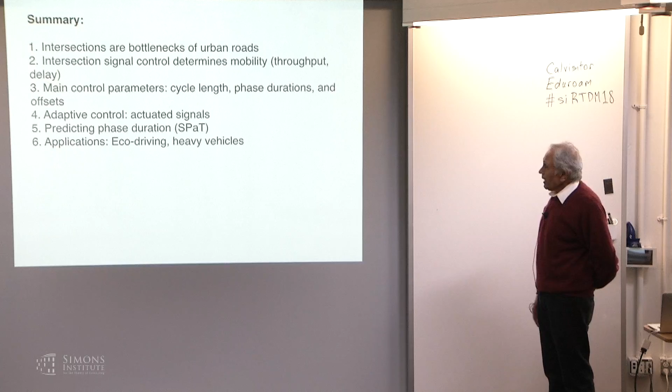And then I'll move to adaptive control, where the duration varies depending upon the sensed traffic by the controller. And then predicting how long a particular phase will last, and some applications for why people care about that.

And so I said intersections are bottlenecks, so let's look at that intersection, sort of a typical four-leg intersection. And in those four legs, there are two lanes - well, there are three lanes, but let's just look at the left turn lane and a through lane. The right turn lane, I assume, is always permitted, so there's nothing to do with the intersection control, because the right turns are always permitted. So let's assume there's four approaches, one through and one left turn lane.

A typical number about how much capacity, how much flow one lane can carry - a number to remember is about 1,200 vehicles per hour. So 1,200 vehicles per hour can go through one particular lane. It may go as far up as 1,800, but that's just for purposes of this. So the access capacity, the number of vehicles which can enter that intersection - you have 8 possible lanes, 2 in each approach. So 8 times 1,200 is 9,600 vehicles per hour. That's the access capacity of that intersection.

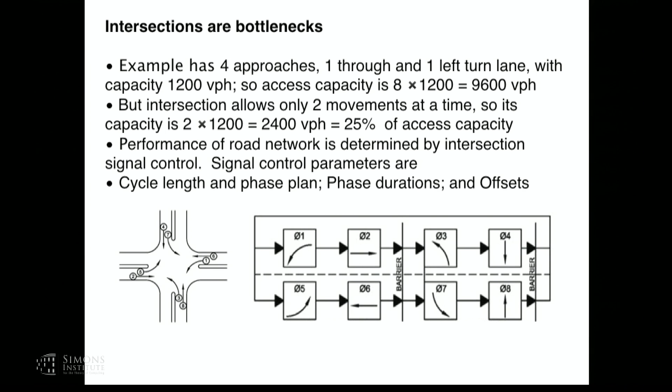However, the intersection can only allow 2 of these movements at any given time, which are non-conflicting, otherwise you'll have a mess. So only 2 are permitted, which means the intersection will permit at most 2 times 1,200, or 2,400 vehicles per hour, which is 25% of the access capacity. So the intersection is the bottleneck - it can only carry 1/4 of the throughput that the roads can bring to it. So the performance of the road network is determined principally by how the access to the intersection is controlled.

That's usually by means of signals - either you have green, in which case you can go, or it's red, in which case you shouldn't go. And so the signal control parameters are cycle length, and the phase plan, the phase durations, and the offsets.

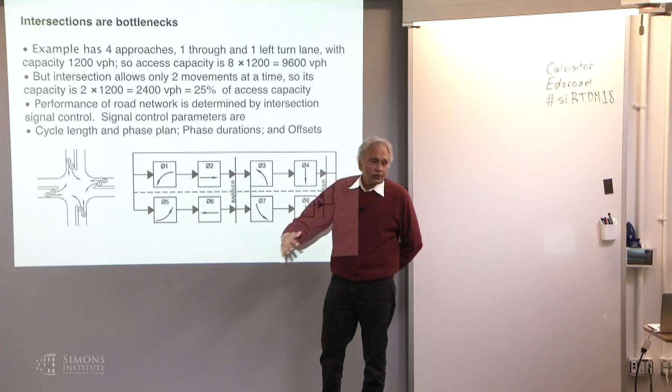So this particular intersection, we have each movement called a phase, so there's 8 phases. The odd numbered ones correspond to turns, and the even numbered ones correspond to through movements. So that's just something to remember. If you talk to a traffic engineer and he says phase 1 and phase 5 are actuated at the same time, that means 2 left turns are actuated at the same time.

So typically in a phase plan, you'll have 2 phases that are actuated, get a green at the same time. Then you switch to another 2. And then you switch to another 2, and another 2. So that's how these 8 phases get actuated. And then you come back to the beginning of the cycle. So a cycle consists of a sequence of pairs of phases that get actuated.

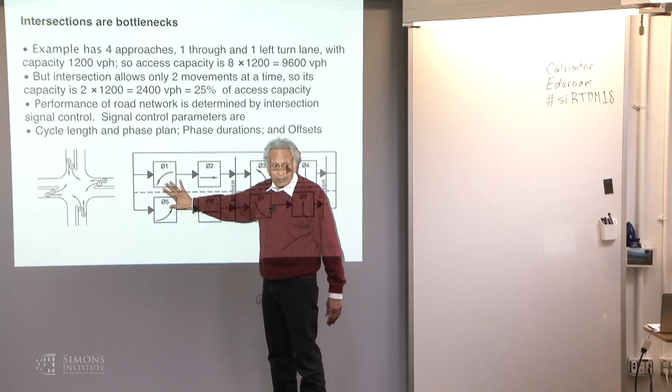The amount of time that this pair, for instance, is actuated is called the duration of that phase - that's the phase duration. And the total cycle time coming back is called the cycle time. Typically, I'm going to assume, and that's the case in most places, the cycle time as you come back is fixed. There's a reason for fixing that, but we'll get to that.

So for instance, this may have a total cycle time of 120 seconds, or 2 minutes, and you may spend 30 seconds in each phase. Normally that's not the case - in the more heavily traveled direction, you have a longer duration than the other.

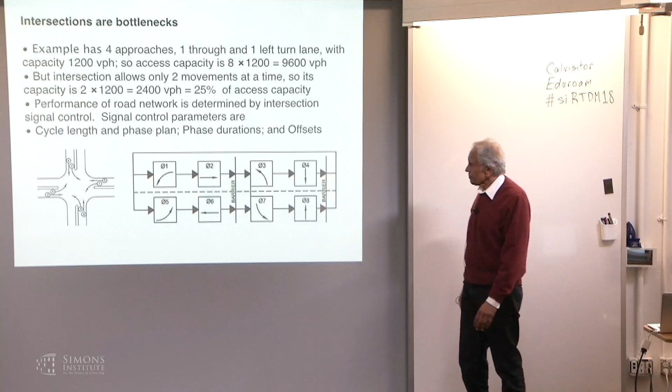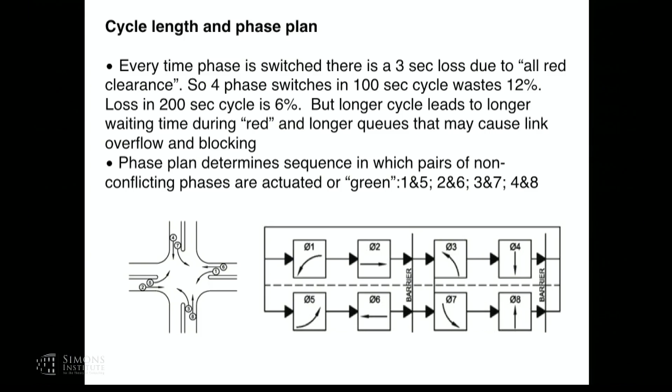So you can think about, if you're a queuing theorist, that this intersection consists of 2 servers, for the 2 directions, and there are 8 queues. It can serve 2 queues at a time, but not any 2 queues, because they have to be non-conflicting. I cannot serve this queue and this queue at the same time. So the pairs of queues that I'm allowed to serve, that looks like a standard queuing problem.

There's one hitch, and that is every time you switch, say from this phase to the turns, there's something called an all-red clearance. So I have 2 greens, and before I switch to another 2 greens, I have to have everybody red. It's usually 3 seconds, called an all-red clearance, so that vehicles who are not very alert, who are still in the intersection when the phase switches, get time to get out of there. So that's wastage, and 3 seconds is wasted every time you clear.

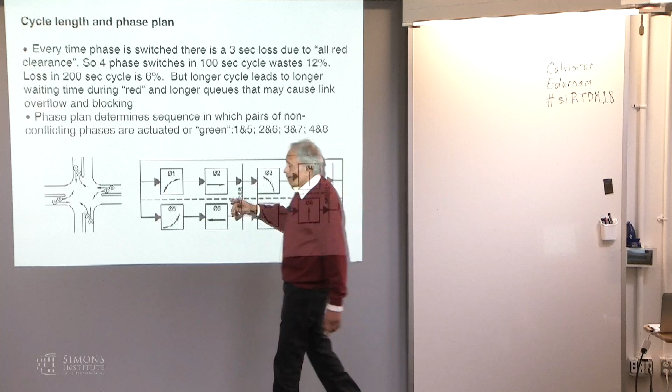I'm disregarding right turns in general. In case the right turns have a signal, then almost invariably the right turn is permitted at the same time as the through movement. But for my discussion, I'm just assuming the right turn is permitted at any time, so they don't offer you any problems in terms of usage of the intersection.

So if you have a switching, or serving discipline, the switching creates a big problem. Most of your theorems of server, multi-processor, whatever, break down.

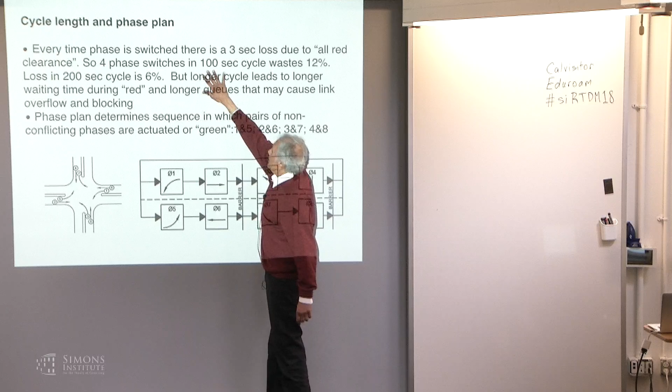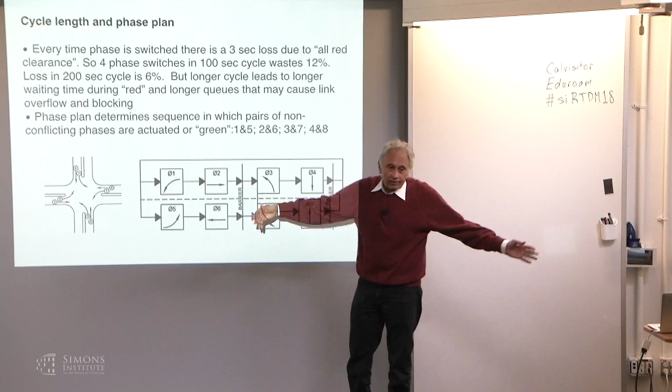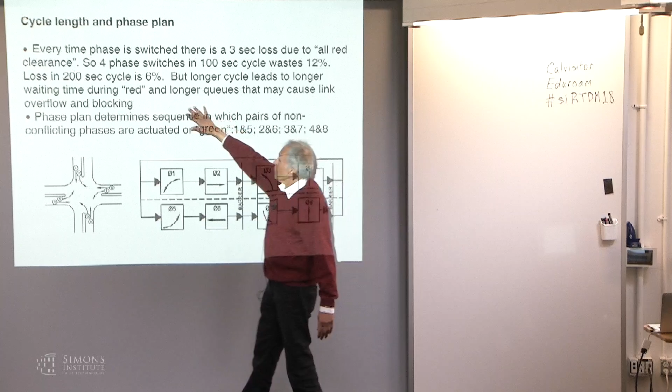So there's an obvious thing to do. Supposing this cycle was 100 seconds, and there's going to be 4 switches per cycle, so I'm going to waste 12 seconds in all red. That's a wastage of 12%. So the obvious thing to do is extend the cycle. If I make the cycle 200 seconds, again you waste 4 times the red, so I only again waste 12 seconds total. So that's a wastage of 6%. So the thing to do is to increase your cycle, then the waste goes down.

But people don't like increased cycles. They're going to wait for 2 minutes or 3 minutes or 4 minutes. So that's one problem, that people get upset for a long cycle. But more importantly, if there's a long cycle, then there's also a long red, and the queues build up, may saturate and affect the previous signal. So you have to compromise. You want a long cycle to reduce the wastage, but you want a short cycle to prevent queues from building up. So that's an issue about how big a cycle length you should create.

Typically, if there's a lot of traffic, and you'll find this in most cities, the cycle lengths increase, because if you give too much red with heavy traffic, you'll saturate the signal. And if there's very little traffic, at the middle of the night, the cycles are normally shorter, so people don't wait, since there's plenty of capacity.

So this analysis is currently non-adaptive. Not yet, I'll come to the adaptive part. But the adaptive part is principally for phase durations being adapted, not the cycle time. The cycle time is kept fixed, for a reason we'll come to, which is offsets. So offsets require a fixed cycle time.

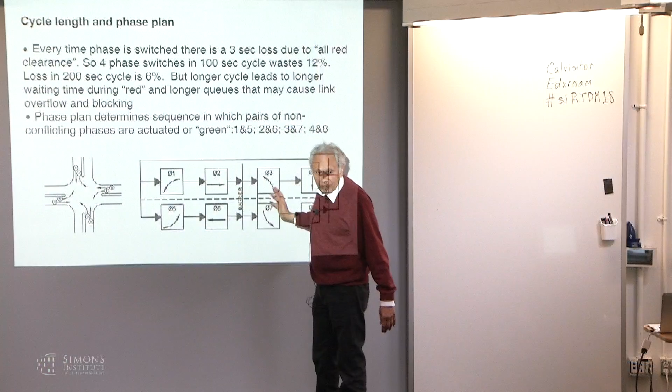So the phase plan determines the sequence in which phases are operated. Now the duration, how do I fix the duration? Let's take a phase I. We have somehow managed to fix the cycle time, t, 100 seconds, 200 seconds, whatever it is. Then for phase I, g sub I is the fraction of time in the cycle that direction gets a green, the green time. So g sub I divided by t is the fraction of cycle devoted to phase I green.

S sub I is some magical number called the service rate if we're queuing theorists, but normally it's called the saturation flow rate by traffic engineers. It's exactly the service rate, which says that if nothing else is going on and you had an infinite queue and this light was green all the time, S sub I vehicles per hour would go in that direction. That's S sub I.

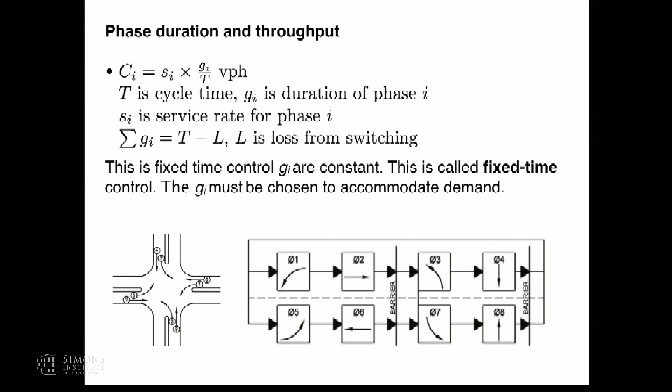So you have to select these G sub I's, that's the phase duration. S sub I is a physical thing depending upon the width of the road, whether it's graded or not, so S sub I is given physically. T you've already decided, so you have to pick G sub I. There's a constraint: the sum of the G sub I, the total green time, is the total cycle time minus the loss due to red clearance. So it's a straightforward problem, right?

This is called fixed time control. I'm going to fix G sub I for every cycle. There's nothing adaptive here, right? It's a fixed time control, and so the G sub I's are constant that you will select, and they must be chosen to accommodate the demand.

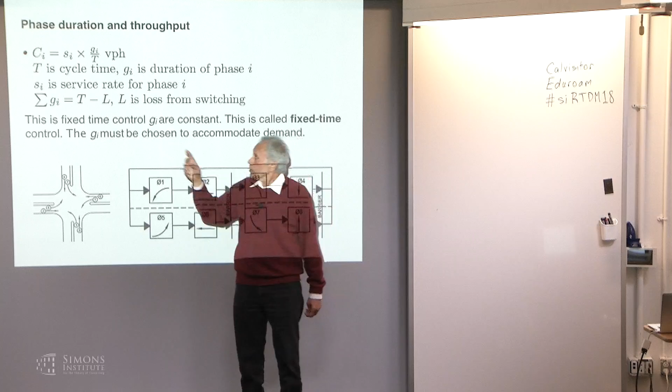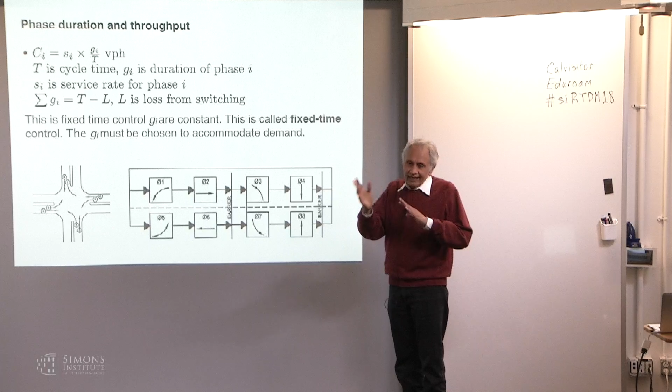Depending upon how much demand there is approaching in the through directions, from south to north versus east to west, you have to select the G sub I so that C sub I will be larger than your demand. If I give you the demands, it's a straightforward problem to figure out G sub I. There's some flexibility as to how you should choose GI, and because hopefully the total rate available is larger than your demand, you can distribute the excess in all directions, or toward a particular direction where there's greater uncertainty about the demand.

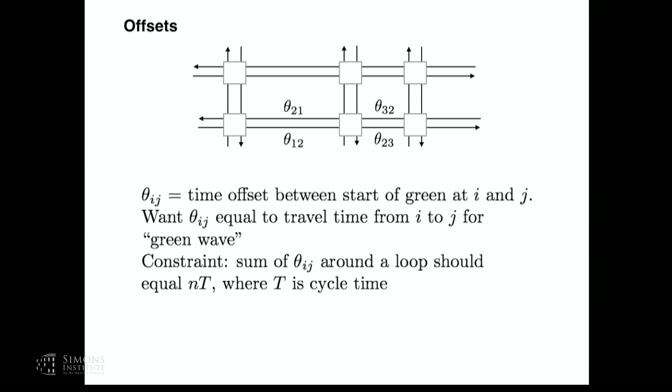I started green, it takes me 5 seconds to get here, or 10 seconds to get here. Then I want this green to start 10 seconds after this one. Is that clear? And then this takes 7 seconds, so I want this green to start 7 seconds after that one. That displacement of the beginning of green is called the offset. The offsets are very critical, because that determines whether everybody — if it's a bad offset, I only hit the red light every time I cross. And if it's good, synchronized, so-called, then I get a green wave.

We assume, implementation-wise, that there's a common global clock. So implementation-wise, there's somewhere some intersection — it doesn't matter — where these offsets are set by a traffic management center, which says right now is 0, and the cycle time is 120, and you will start at 0. Your synchronizing phase, which I said in this case is phase 2, will start 10 seconds later, 20 seconds later, and so on. So it looks easy, but there's a problem.

Can offsets also be dynamic? It can be, right? It absolutely should be dynamic — the offset should be dynamic. But I'll come to making things dynamic later. Before I get to that, even in the static case, there's a problem.

The problem is that if I go around a loop, I'm coming back at the same point in the cycle. So theta 1,2 plus theta 2,3 plus theta 3,2 plus theta 2,1 must be a multiple of the cycle. That's an integer constraint on the cycle — it has to be a multiple of the cycle, because I'm coming back to the same point.

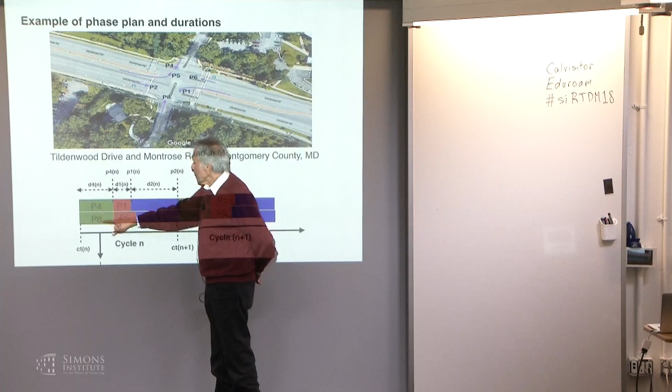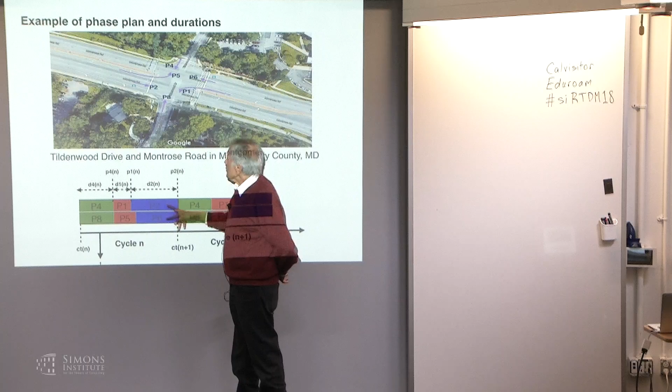So there are only 6 phases in this; 2 phases are missing or have 0 time. Let's suppose the plan is that P4 and P8, the through direction for the minor street, come first. Then come P1 and P5, the two left turns, and then P2 and P6, the two major through movements. I've drawn them purposely this way to denote that this duration and these durations can be varied.

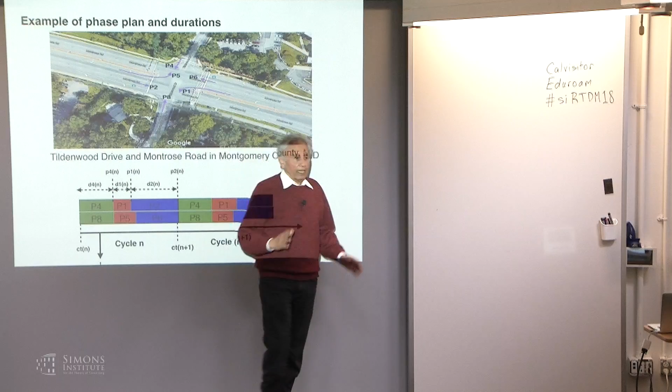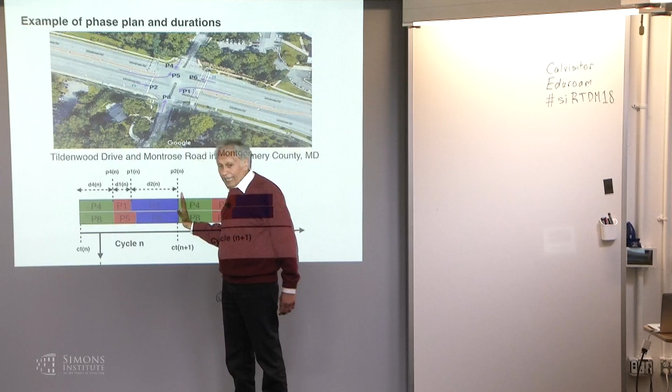That's called actuated signal or adaptive duration—they can be varied. We'll worry about how they're varied. But the cycle time is fixed. So whatever variation you get, if you have extra time, you give it to the major direction; if you have less time, you steal it from the major direction. That's a standard actuated control.

How do you decide whether to give more to P4, P8, or P1, P5? Well, you have detectors in the ground that measure how much traffic demand there is. It's all imperfect, but that's what it's supposed to measure in this direction and that direction. If the traffic is higher than expected, you give it some more green—if I have more left turns than expected, I give the left turns more green. And if there's less, I turn the green to red and give the extra time to the through movement.

That's an actuated signal. Increasingly more and more signals are becoming actuated, because it provides some adaptivity—if I notice there is more demand here—but it's not long-term adaptation. There's no algorithm which is going to estimate the demand that is coming and account for that. Everything is sort of a 1 cycle, 2 cycle, 3 cycle horizon.

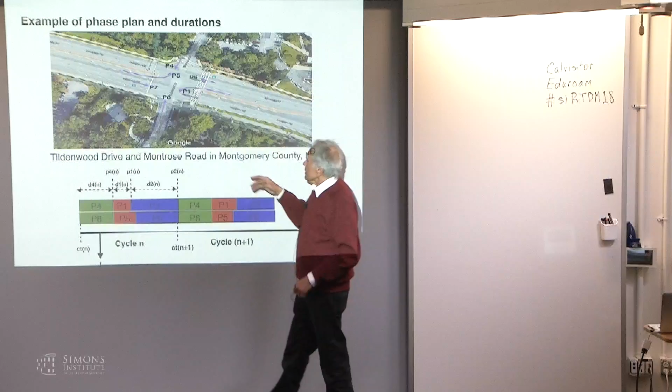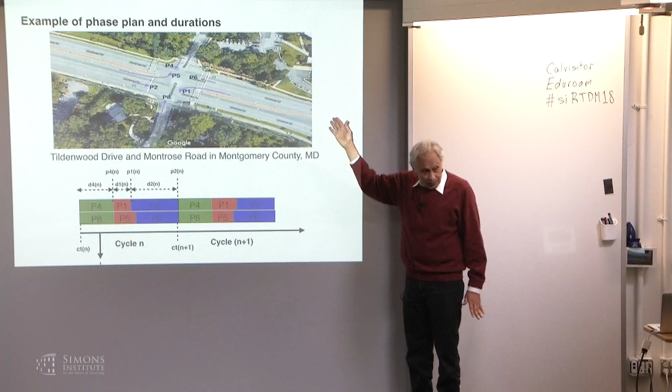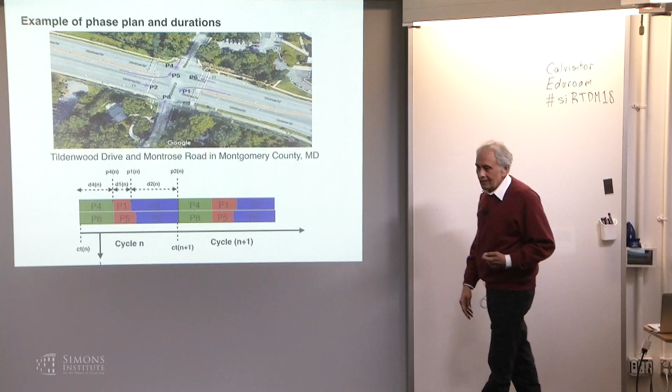That's the current practice. You would say it's possible that if I see a lot more here, I know they will show up at the next intersection, so I can use that to give more time to the through movement in that direction. Okay, so that is done—several commercial packages look at 2, 3 intersections and decide.

But if this is variable, then you cannot predict when my green will happen. Now, you may not care, but it is useful, and that's where I want to go with an actuated signal. So I'm going to look at the durations, just looking at one direction—the major direction. I'll ignore this one, but the same calculation goes for the other. So what I want to do is to predict.

So at any time t in the cycle, I want to predict, this is phase 4, and p4(n) is the end of that phase 4. So it's the end of green, or the beginning of the next red. So I want to predict at this time t, how much time is remaining in phase 4, how much time is remaining in phase 1, which is the remaining phase 1 plus that, plus etc.

Right? So these phases are no longer fixed time, so it's not 20 seconds, 40 seconds, 60 seconds, but maybe 20 seconds plus or minus something, and 40 seconds plus or minus something, and that's a random thing which depends upon the traffic, and that I don't know how much traffic there is. Not only does it depend upon the traffic, but it depends upon how the controller senses that traffic and what kind of algorithm it is using to increase or decrease the green times.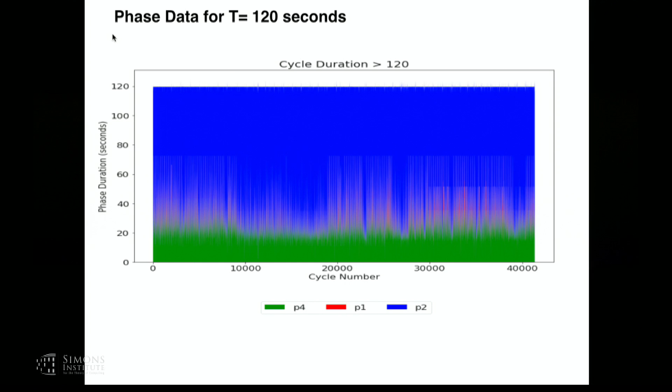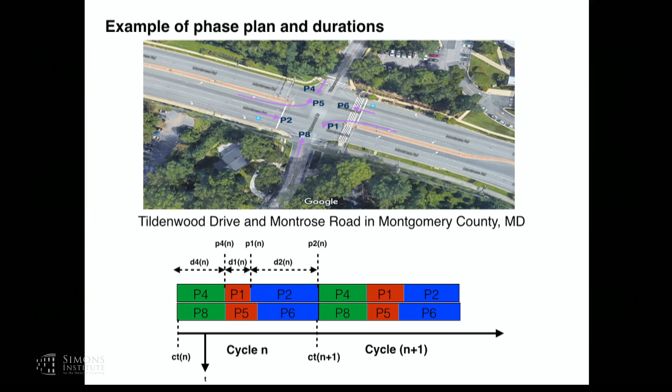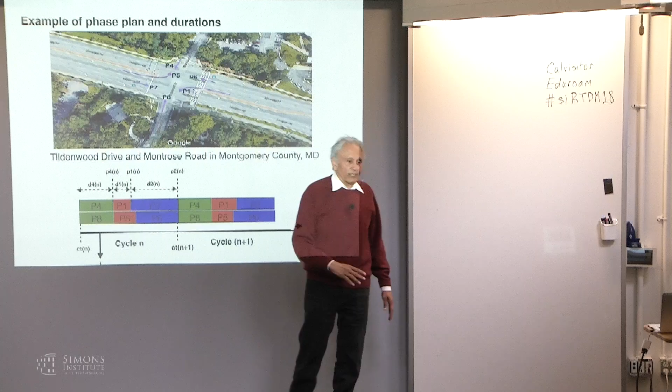And why is that? And that is because it's a fairly wide street, and this green, when it's green, pedestrians are allowed to cross. The pedestrians have to make it to the other end safely. So there's a minimum green which is given for the pedestrians, right? Beyond the minimum green depends upon how much traffic there is. So that's the minimum green.

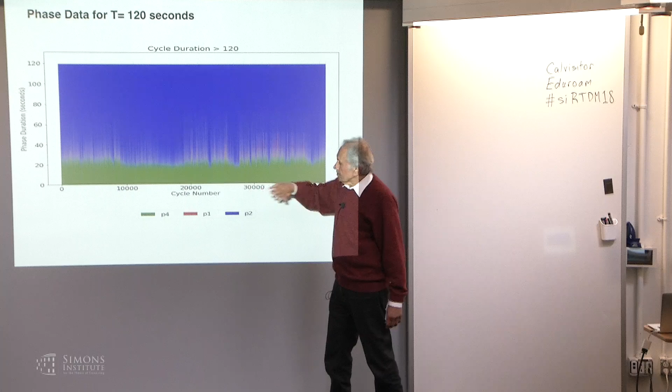So you can take the histogram of D4, and you see that it's minimum at least this much. That's for the pedestrians. And then it goes up, and it's got this shape. This shape comes from an extra vehicle, so the extra vehicles extend the green probability, and so on.

Okay, now we're somewhere t seconds into the phase P4. It's still green, and you want to know how long it will continue. There's an obvious thing you do: at any time t, say 34 seconds have passed in that phase, and you're required to predict to the vehicle how long that phase will last. What will you do? You take the expected value of the remaining duration given time t. If t equals 30, the prediction of D4 is still green, so D4 beyond 30 is your best prediction. You do best if you use mean square or something like that - that's the conditional expectation of the remaining duration.

Some interesting thing: if you look at this, now it's the duration, remaining duration, D4 minus T. What you observe is initially it'll decrease - of course time has gone by, so you expect the remaining duration to decrease. But then all of a sudden, your best prediction goes up because you passed that small thing, and now the next big probability is somewhere there. And then it goes back again. This is like your file downloads, right? The time goes down, 5 seconds, 4 seconds, 2 seconds, then all of a sudden it goes up to 5 seconds, etc.

So the residual phase duration may increase or decrease. That's the nature of the actuated signal.

Now, one reason people are proposing that a SPAT intersection should provide you the SPAT signal is for so-called eco-driving. Eco-driving means I've arrived at the beginning of the intersection and I want to go through the rest of the street. Most of the energy is consumed in acceleration and braking. If I know that this thing will be green in 20 seconds from now, then I can adjust my velocity profile so I don't do acceleration and braking and make it in the green window. So that requires me to tell you the SPAT prediction.

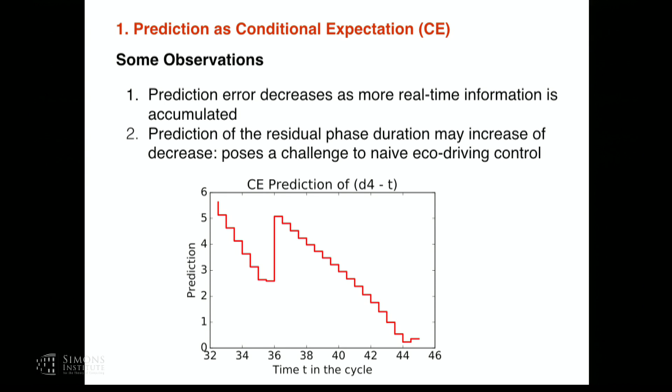But this kind of story, because the prediction fluctuates, makes it difficult to do eco-driving. So Audi has now announced they have something called a countdown timer, which gives you how long the green will last, or when the green will start, one way or the other. But it cannot be just a countdown timer - it also has to allow a count up in the thing. So I'm not sure exactly what they mean by that.

So let's see how you do this eco-driving. How would you design the variable speed profile of this vehicle going through that link? This is the naive user who's uninformed, doesn't know when the red is going to happen and when the green is going to happen. The whole link is 400 meters, and it started at 22 meters per second and just goes at constant speed. It'll hit red and then have to stay until it hits green and go on. So a lot of energy is going to be wasted in the braking. That's the so-called naive user.

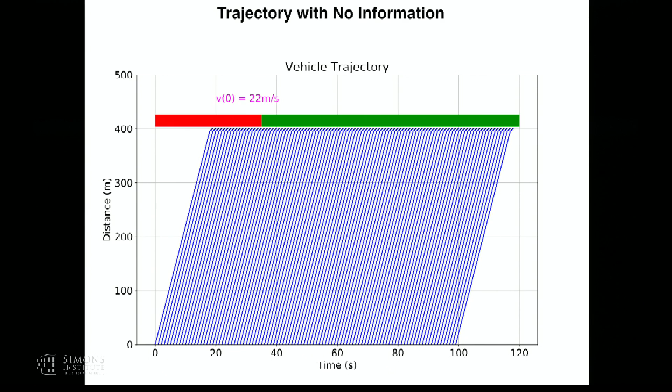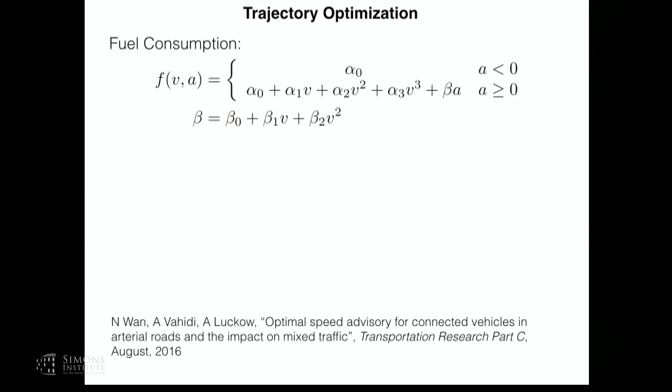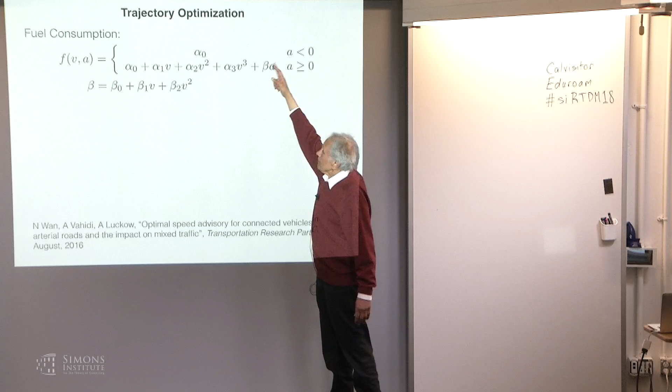Now, if you're doing eco-driving, you are going to design the speed profile of your vehicle as it goes through that intersection when it receives the SPAT signal. So that's in the subsequent stuff, this is the model for the fuel consumption, which depends upon the speed and the acceleration of that particular vehicle. As you'd expect, it increases with speed and increases with acceleration. If it's negative and you're decelerating, then you just pay something constant.

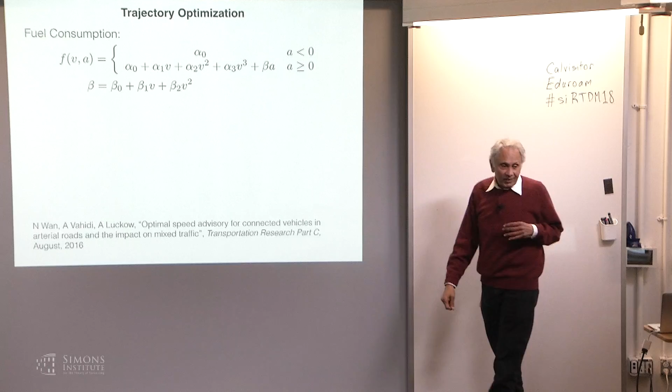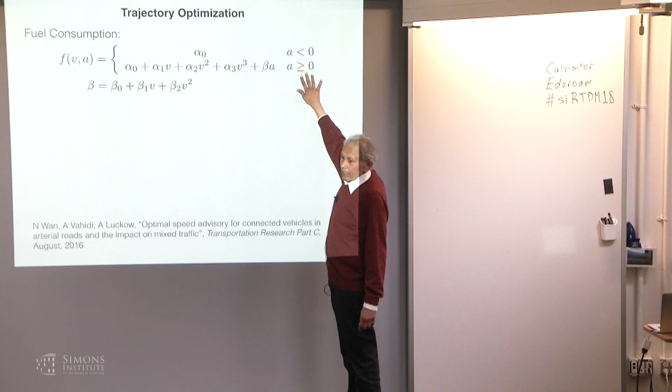Otherwise, that's what you get. So given that, we're going to design, and given when the light is going to turn green, we're going to decide. Can you say what is A? The A is the acceleration. This is decelerating, this is accelerating. But isn't that under your control as well? Oh yeah, it is under your control.

So I haven't yet said, but this is the way your fuel is going to be consumed. Okay, that's the model of the fuel consumption. So you're going to go from beginning to end, that's the model of your fuel consumption. So what's V of t, or what is A of t, and therefore V of t, which is its integral, how is that going to be designed?

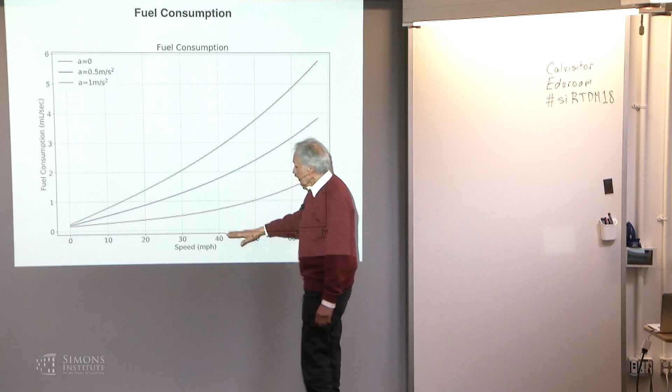So here's what the fuel consumption looks like as a function of speed. It really increases fast with speed, right? Typically, if you're driving at a constant speed, then the drag is what you have to combat with gas, and that's the way it goes. If the acceleration is 1 meter per second squared, and so on.

So the problem is, if I tell you when the red will change to green, that's the time t_red, and I give you that ahead of time at time 0, which is when you're leaving the previous intersection and entering this stretch of road, and I'll tell you what that is, this is the amount of fuel you'll consume from T0 to TF. TF is when you reach the end. D meters is how long that road is.

So the standard control problem, with perfect information, I tell you how much time - 15 seconds, 20 seconds, 2 minutes, whatever. So you want to solve this, so discretize everything. That's the discrete formulation, and you solve it by dynamic programming, going backwards. We know what the boundary condition is - you have to reach D.

And here's what it looks like. If you start out at 25 meters per second, and you want to hit this when it's green - I mean you don't have to, but if you hit it in red, that's bad, because now you're going to brake a lot and waste too much energy. So obviously you should time it so you just enter and exit the road when it's green. So that's what these profiles will look like.

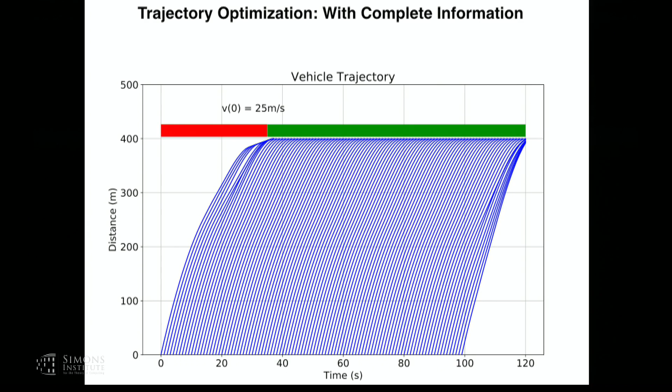So if you're starting at time 0, you'll go this way, and then you know ahead of time, so your velocity profile should be like that. Then you clear the intersection. At the end here, it's becoming red, so you're squeezed a little bit - you have to make it through during the green, so you have to speed up a little bit faster than if you're in here. So this all makes perfectly good sense.

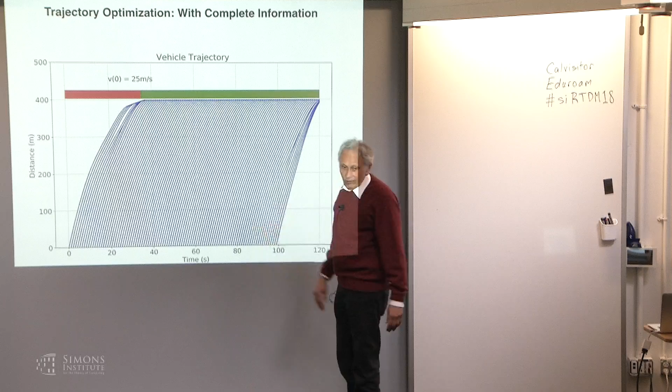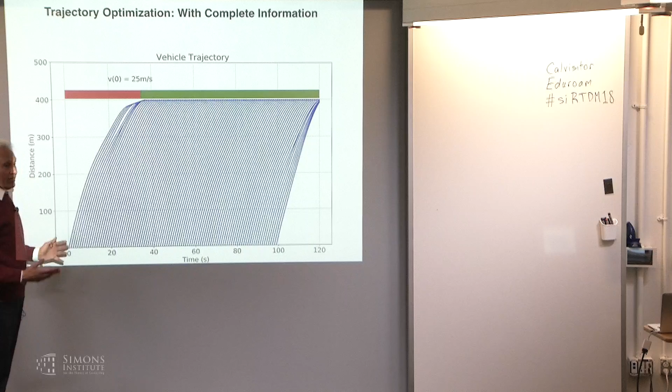Why would it make sense to change the slope as opposed to just choosing a lower slope at the beginning? Why would you not choose just a lower slope at the beginning, over here, instead of changing the slope? This is the optimum, right? So there's a trade-off between speed and acceleration.

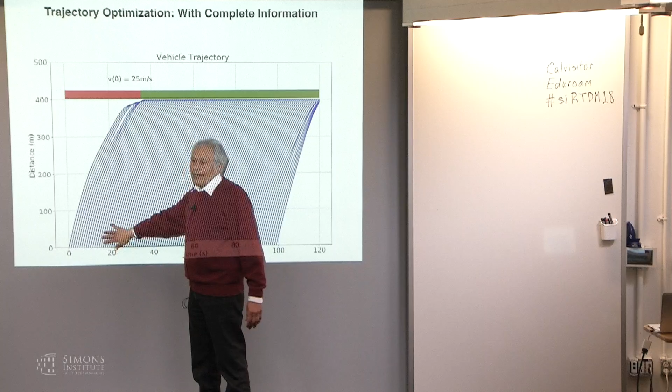Okay, I'll go back. This is for an initial speed - I'm starting, that's my boundary condition. I entered this road at, whatever, 25 meters per second. That's for the given initial speed, that's given. So different initial speeds will have different profiles than this one, right? So that was an example where the initial speed is too fast in some sense - you have to slow down. In that respect, yes. But let me tell you what is too fast and what's too slow. It's too fast because you see this, right?

So this fuel consumption is milliliters per second, but that's not the best measure. What speed should I go? If my road is very, very long, so I'm not going to hit that red light for a long time, then the speed I should go is the speed with the least milliliters per mile, not per second. So I have to take this and divide it by the speed to get the optimum. The optimum speed is somewhere between the slow thing and the fast thing, if it was a long way to go.

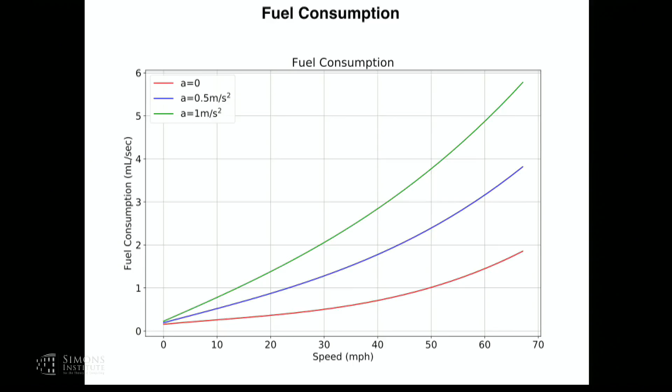This is assuming a single vehicle, not a fluid. One vehicle - the other vehicles presumably will just follow you in this.

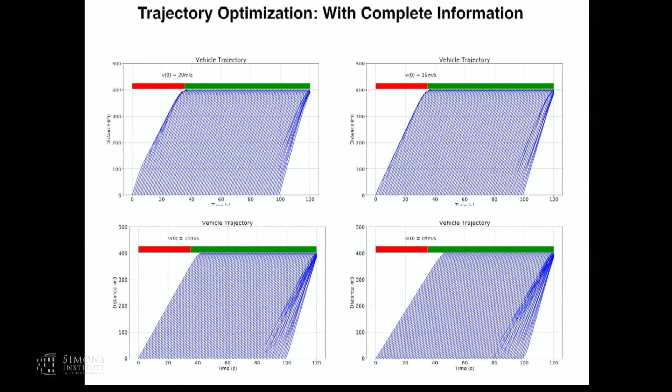I have very little time, so I'll just finish the story. We've done experiments, and the experiments say that you save up to 20% of the fuel cost.

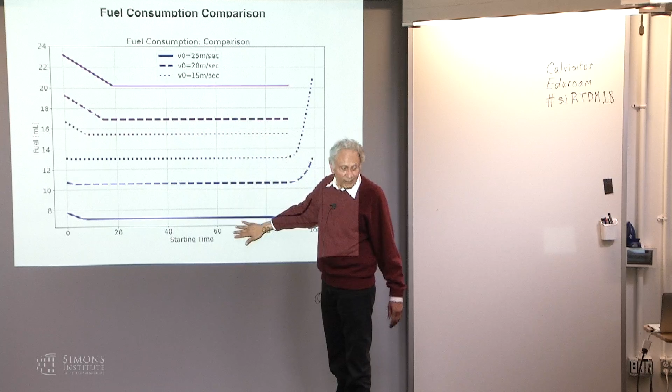So here's an example of fuel consumption. This is the uninformed user at 25 meters per second, and this is the informed user at an initial speed of 25. You save a lot, right? And as the speed becomes the ideal, you begin to save less and less.

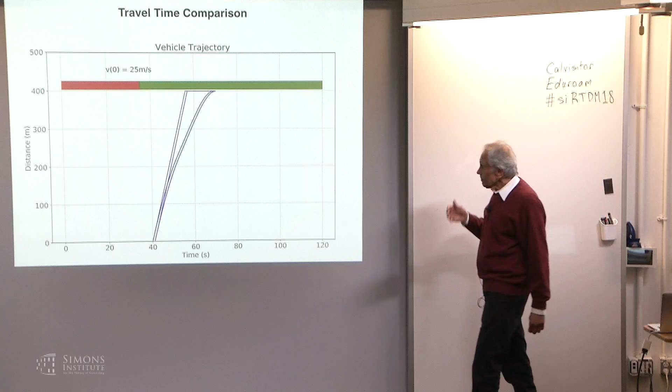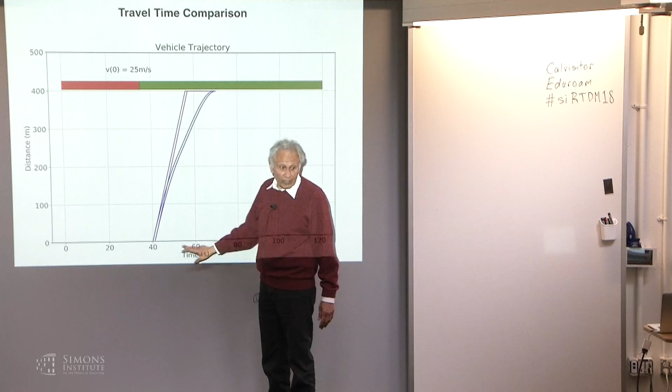So time - this may be interesting. This is the fuel-minimizing trajectory, and that's the naive guy. So you do take longer. If you're minimizing your fuel, the time you take to reach there is more, so you are driving slower than for this particular example.

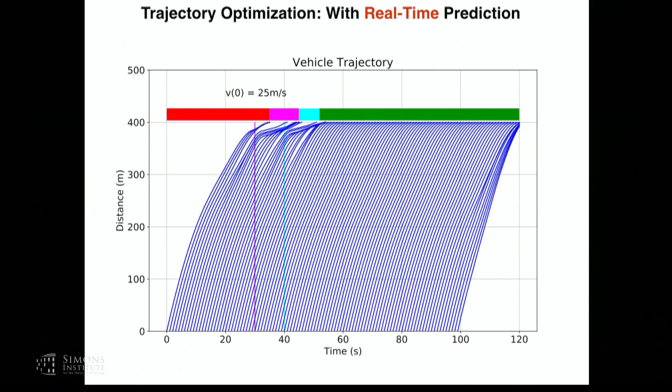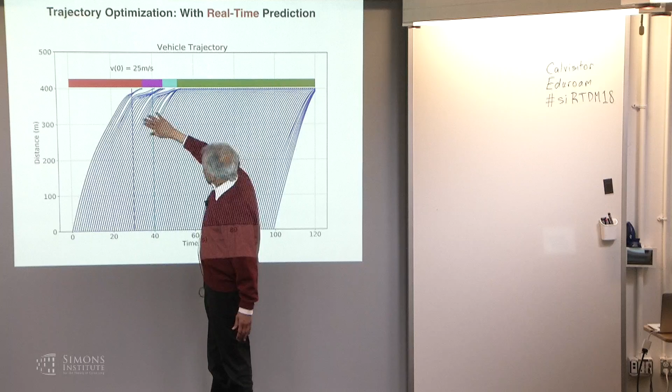Now suppose we have this interesting case where the prediction varies as time progresses, and it may happen that in the middle of your driving, the thing changes. So I won't bother you with that. Depending upon the number of steps, these people who came here - it was initially this red, then it became this, and then it became this. These people, unfortunately, it's too late for them, so they will have to stay red. These people are a little bit better off, and they slow down, but not sufficiently, and so on, until these make it into the green.

So let me conclude with one more point.

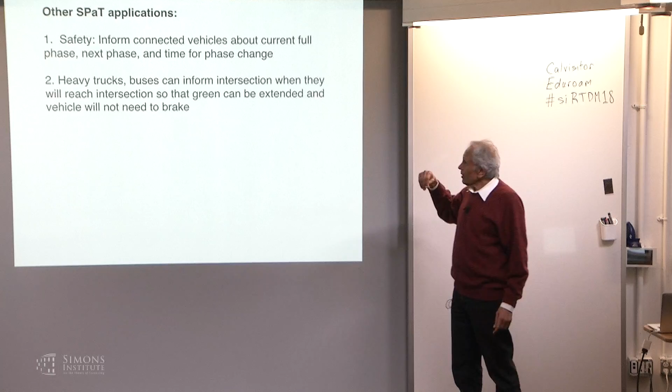So there are other SPaT applications. One is in safety, which is it'll inform vehicles how long this phase will last and what the next phase will be. So you want to make a left turn - you can't do it now, but it'll tell you how long you need to wait to make a left turn, so whether you should risk it or not. More importantly, it'll tell you what the phases of the other users are. Because right now you just see your green or your red, and you don't know whether the other ones can take a left in front of you or not.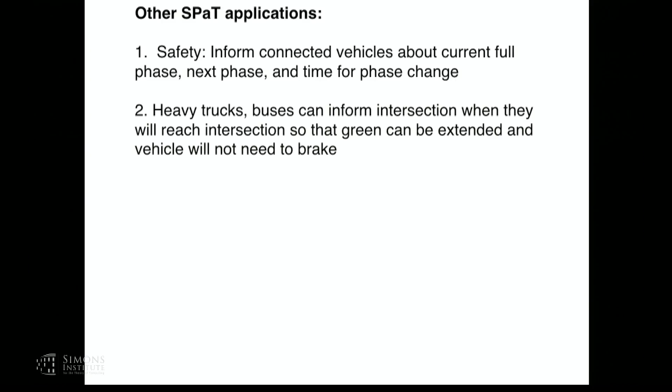Perhaps a more interesting thing is for trucks and buses. Streets get chewed up by heavy vehicles. Your light vehicle doesn't really affect it, because the chew-up of the street depends upon the cube of the weight. So a 5-ton truck will chew up lots and lots more of the road.

So in Berkeley, if you notice - I don't know wherever you come from - but in Berkeley, for buses, at the bus stop there's an apron of concrete. The bus comes and stops there, because the biggest wear and tear happens when it's braking and when it's accelerating. That's when the maximum torque is on the wheels, and that torque goes to the pavement and chews it up.

Trucks are even worse than buses. So if a truck is coming, it knows where it is, perhaps from the GPS. So if it gets a signal saying this phase will last for 15 more seconds, it can adjust. Or even better, maybe the intersection can give it more green so that it goes through without hitting the brakes.

Typically, buses are given that privilege. So buses at many intersections have a special signal, so the intersection gets a signal saying the bus is arriving, and it may extend the green for the bus to go through. If the bus is going right in the middle of the red, then it's not going to do that, but otherwise it will.

So this can help a lot in terms of infrastructure and pavement lifetime. I'll stop over there. Yeah?